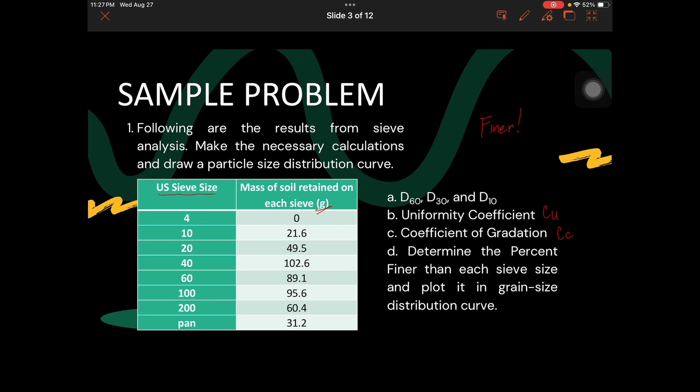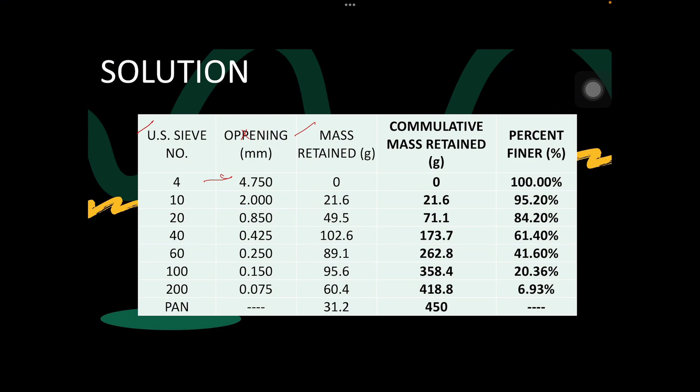This is the equivalent size in terms of millimeters. Same thing for number 10, which is 2mm, number 20 is 0.85, and so on, number 200 is 0.075 millimeter for its opening. This is very important because it's one of our coordinates later when plotting the particle size distribution curve.

Next, mass retained - what we need to do first is get the total. So when we add 0 up to 31.2, we get 450 grams.

After that, the next step is to get the cumulative mass retained, still in terms of grams. When you see the word cumulative, it means it is the previous plus present, so we can get the actual value - the before, then during, to get the actual.

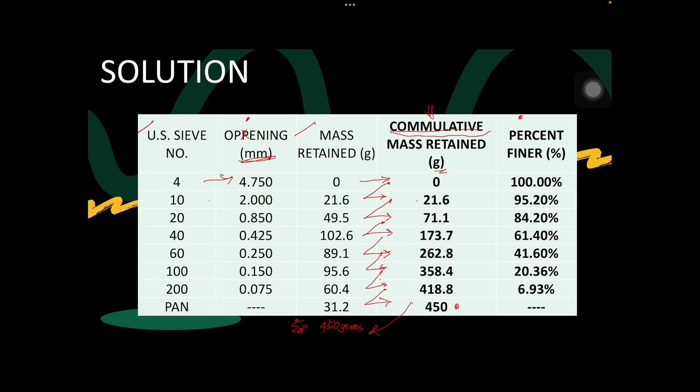Assuming this value is the summation of the entire result from the sieve analysis, and cumulative mass retained - let's denote that as Y.

To get our percentage finer, let's call it Z. Z equals summation of the entire mass minus Y, or in this case Y1, this value, Y2 - it varies.

Then this is also the summation of the mass. Since we're talking about percentage, we multiply by 100%. For Y1 or the first variable: 450 minus 0, divided by 450, times 100, equals 100%.

Next, again 450 for the total mass minus 21.6 for our second Y, over 450, times 100, we get 95.2% as the percentage finer, and so on. That's how we solve the percentage finer - this is our X value, and this is our Y coordinate for plotting.

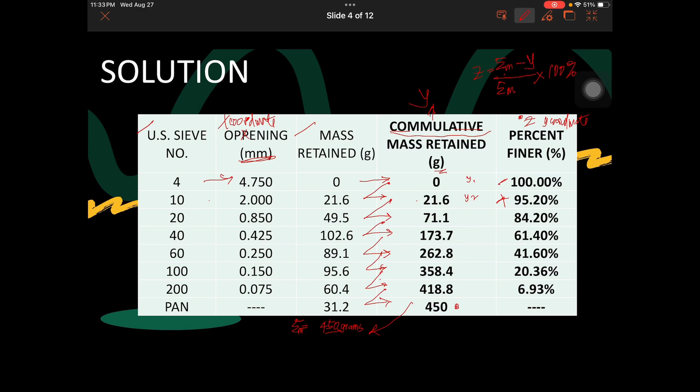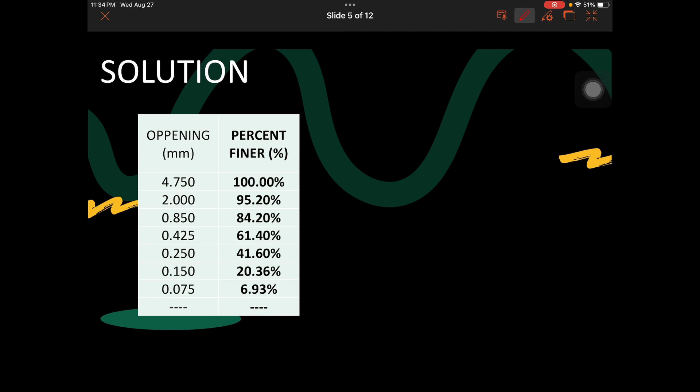X coordinate. So after we identify our coordinates, let's simplify them. At opening 4.75, we have percentage finer of 100%, 2mm at 95.2, 0.85 at 84.2, 0.425mm with 61.4 percentage finer, 0.250mm with 41.60 percentage finer, 0.150 for 20.36% finer, and 0.075mm for 6.93% finer. So these are our X coordinates. This is our Y coordinate.

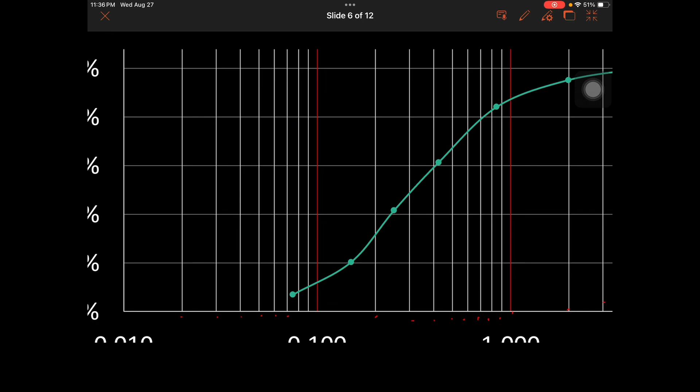So to compute the diameter at a specific percentage finer, we just plot a line. For example, D60. This D60, this line, this D60, what is this value? This point.

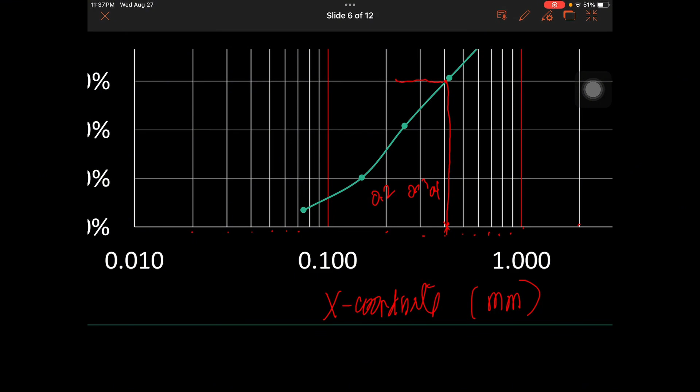What is its value? Then we project it to our value here. This is just a projection to this value. Then what is its diameter? So if we're looking for diameter 60, what is this value? So if this is 0.1, we can say this is 0.2, 0.3, 0.4. So 0.4, then somehow it goes to 0.41, but it's a bit uncertain, or we could say it's 0.41. D60 is 0.41.

Next, D30. This is 40, this is 30%. What is the diameter at 30% finer? So if we project this, what is its equivalent diameter? In this case, it's close to 2. We just estimate what the value will be. This is 30, we project. So approximately we can say that D30 equals 0.189 or 185.

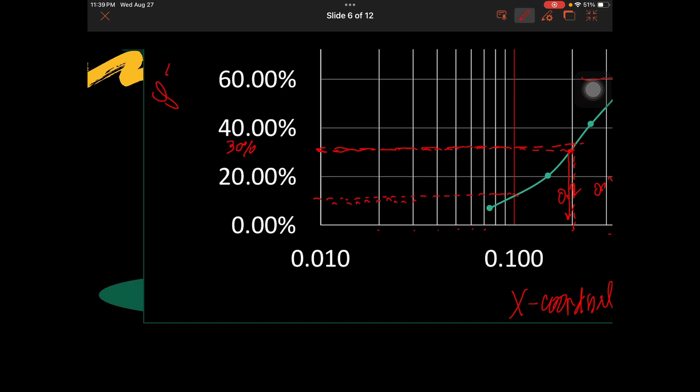Next, for D10, same thing. If this is 20, this is 10. So we project it. We need a straight edge to see where our value or graph intersects, a bit slanted. So we can say that D10 equals 0.088, or 0.09 in some cases. Is this it? 0.09.

So that's how we determine the diameter at a specific percentage finer, depending on what type of diameter at the specific percentage finer. So the first procedure we use is this scale. The catch here is we need our values at least scaled, because we will project them onto the graph. So D60 is 0.41, D30 is 0.189, D10 is 0.088, based on our particle size distribution curve.

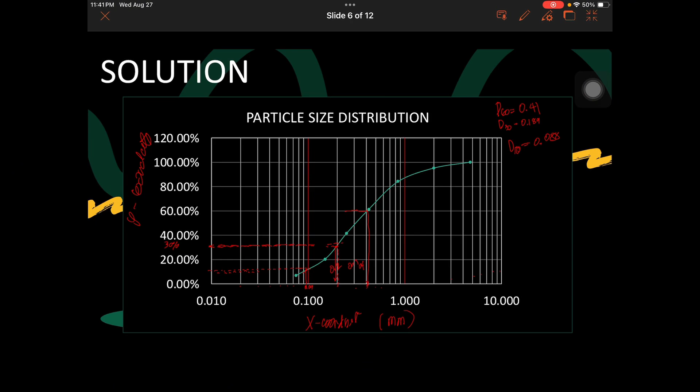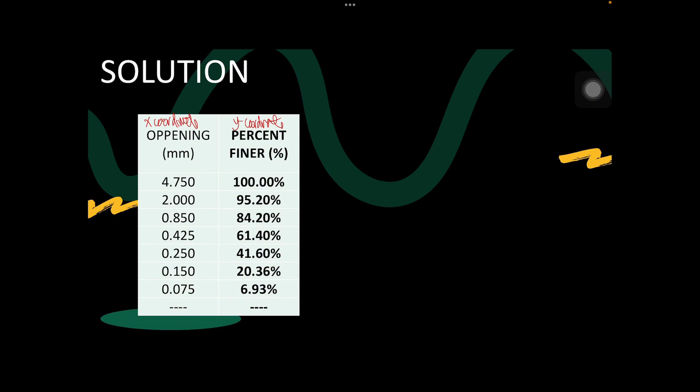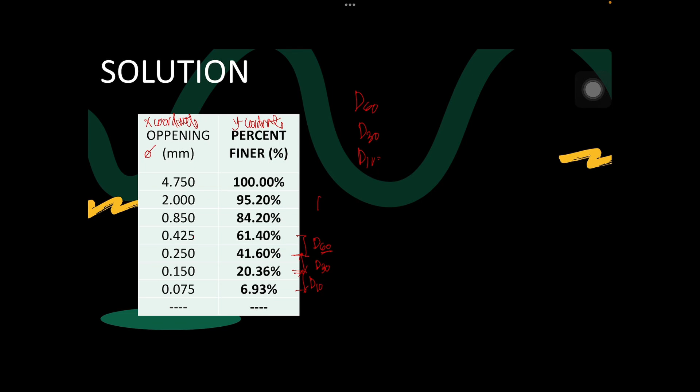Second procedure is we use interpolation. Going back to this, 4.7 is finer. As we said, the diameter is the opening at a percentage finer. So if D60 is what we're looking for, we need to find D60 between these values - diameter at 60% finer - because between 41 and 61.40, that's where we find 60% finer. Same thing for D30, it's between 20.36 to 41.60. And for D10, between 6.93 to 20.36, that's where we find D10. Let's find their diameter based on our percentage finer.

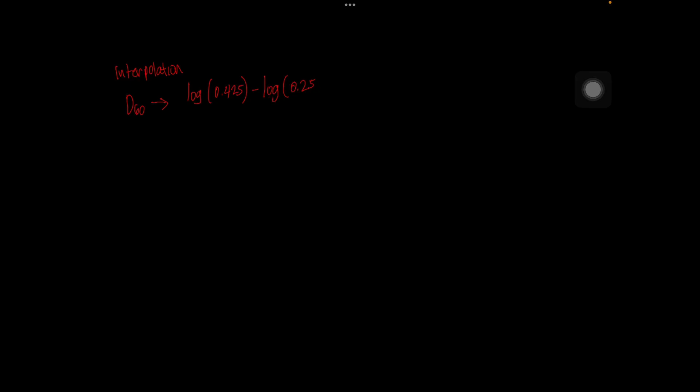Logarithm, since yung x value or yung diameter, yung mga may logarithmic scale, so logarithm at 0.425 minus logarithm at 0.250, divided by 61.4, ito yung kanilang percentage finer, minus 41.60. Ito yun.

Ito yung mga value na yan. Tapos interpolate natin logarithm of 0.425 minus logarithm of the diameter at the 60% finer, 61.40 minus, since percentage finer pinag-usapan natin dito, hinahanap natin yung pang 60, compute natin yung 60% finer. Kapag sinolve natin yan, D60 is equivalent to 0.409, which is roughly equivalent sa ating pagpa-plot.

Next, for the D30, ito mga value naman na to yung tinitingnan natin between this 0.15 and 0.250. Doon natin mahahanap yung diameter at the 30% finer.

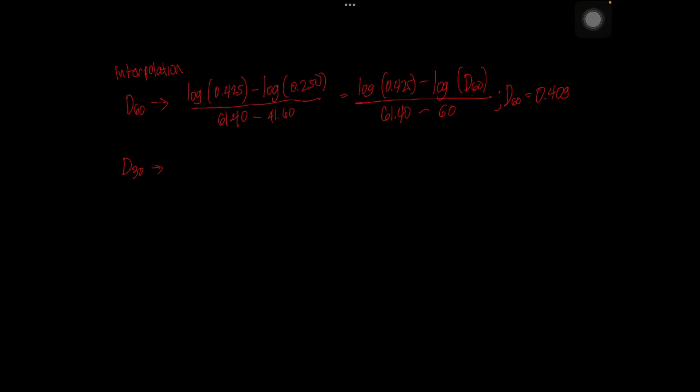Okay, to do that, again, naka-logarithm yung x coordinate natin, 0.250 minus logarithm at 0.150 over 41.60 minus 20.36. Between this value, natin mahanap yung the diameter at the 30% finer.

Logarithm of 0.250 minus logarithm ng D30 over 41.60 minus 30% finer. So, kapag sinip-solve natin yan, makakuha tayo ng value na 0.189.

Okay, for D10, dito natin mahanap sa value na to between this value. Okay, so again, logarithm of 0.150 minus logarithm of 0.075 over 20.36 minus 6.93.

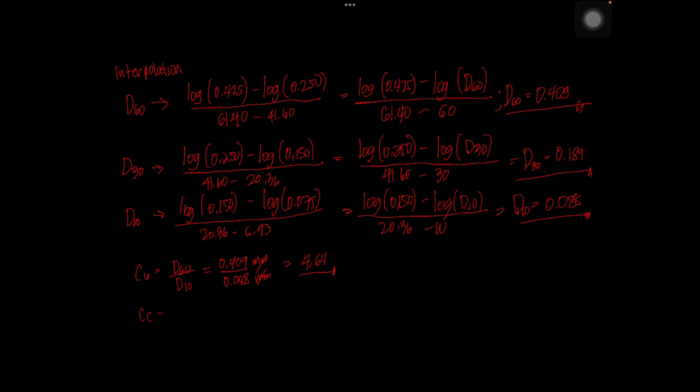Coefficient of gradation D30 squared divided by D60 times D10, which is 0.189 squared over 0.409 times 0.088. Nakakuha tayo ng 0.189 squared divided by 0.409 times 0.088, 0.99 na sagot.

Indeed, meron kakaroon tayo ng possible na iba't ibang sagot, pero hindi naman dapat siya at least nagkakalayo. Okay, so meron namang mga considerable variations naman since depende sa pagra-round up natin. Okay? So, ganun isolve yung problem number 1.

For problem number 2, the grain size characteristics of a soil are given. So, given natin is size in terms of naka-millimeter na siya, 0.425, etc. And the corresponding percentage finer. So, ito yun na yung mga coordinates natin. Ito yung x, ito yung y coordinates. So, there's nothing to solve pa yung mga percentage finer since given na siya.

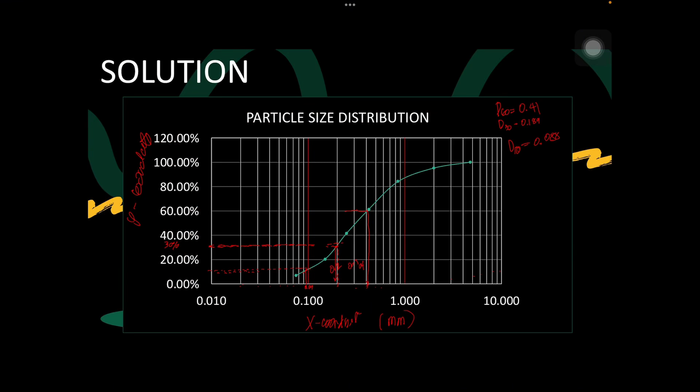Ito yung sinasabi ko, pag greater than 2 mm gravel na yon, between 2 mm to 0.06 is sand, so on and so forth. Kaya kailangan kabisado natin itong particle size distribution table.

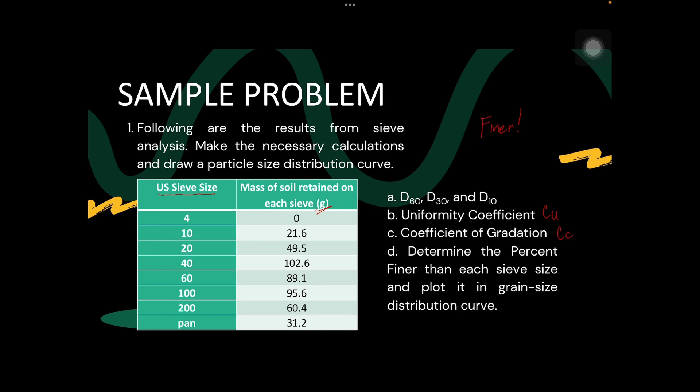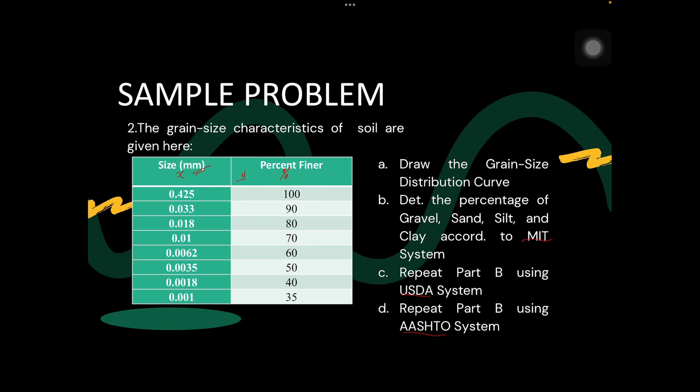Ito naman 90 na 0.033 na 90 yung kanyang coordinate. 0.018 para sa 80% finer. Next naman 0.01 para sa 70% finer.

Ito naman 0.0062 para sa 60% finer. Tapos D50 na 0.0035 tapos 50% yung y coordinate, second to the last 0.0018 tapos yung kanyang y coordinate is 40, and lastly 0.001 tapos yung kanyang y coordinate is 35.

Okay, so ito yung ating plot. So first, ito yung answer sa letter A, yung pagpa-plot ng particle size distribution curve or particle size distribution table natin.

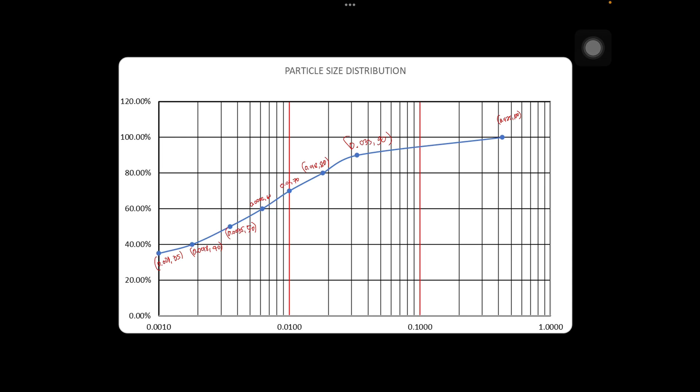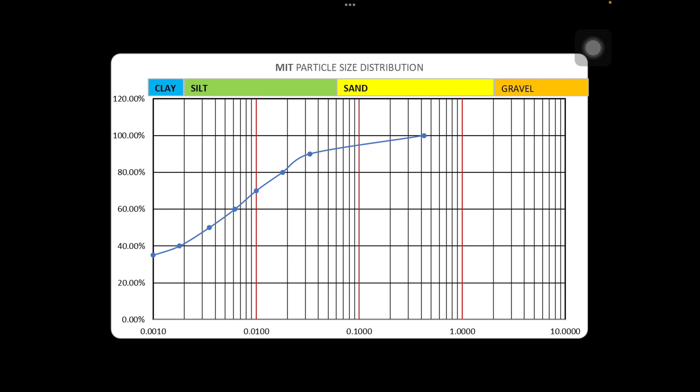Next, solve naman daw natin kung ilang percent yung gravel, ilang percent yung sand, ilang percent yung silt, at saka ilang percent yung clay base sa MIT. So, for the sake of the discussion, ipipilat ko na yung mga increment or mga limits para sa MIT, para sa gravel, sand, and silt, and clay.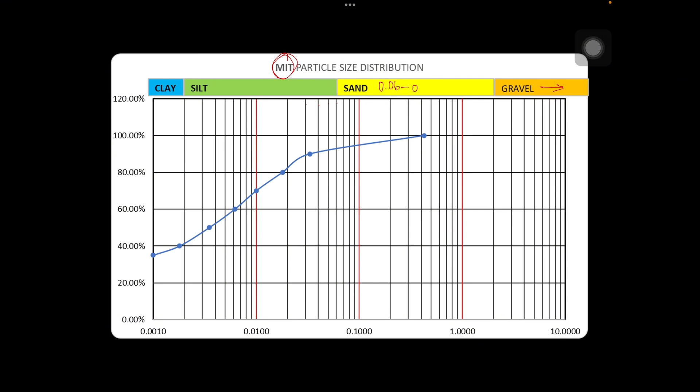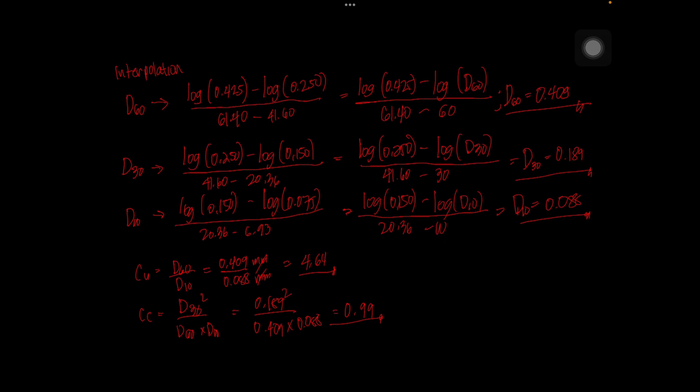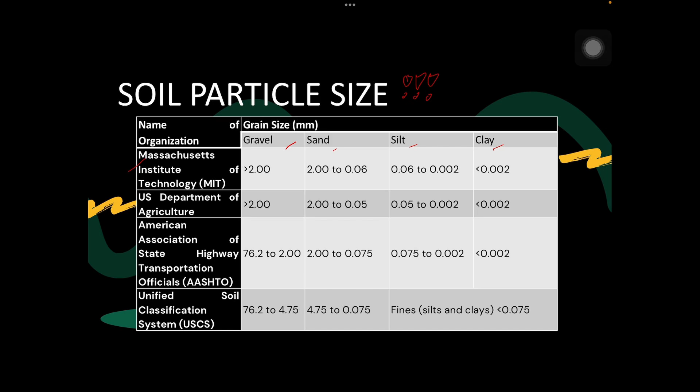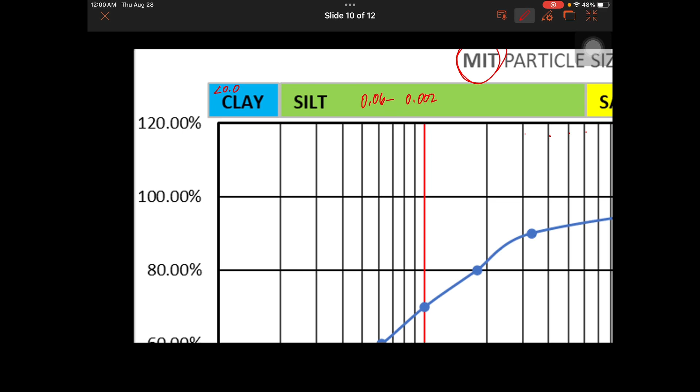So for the gravel again, greater than 2 millimeter, and for sand naman 2 millimeter to 0.06 millimeter. For silt naman, we have 0.06 to 0.002, and less than 0.002 is considered as clay. So ito yung kanilang mga limits. Bahin natin yung kulay.

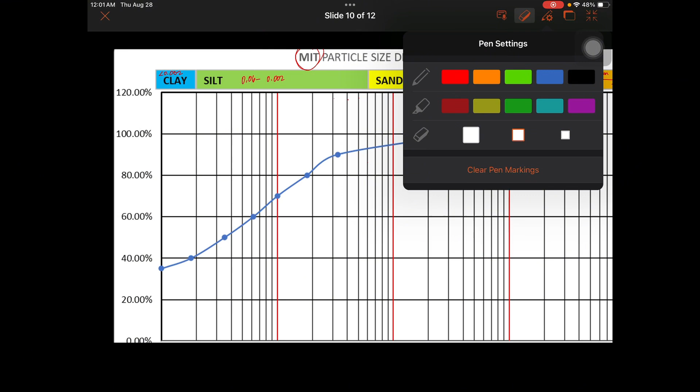Ito yung mga boundary nila.

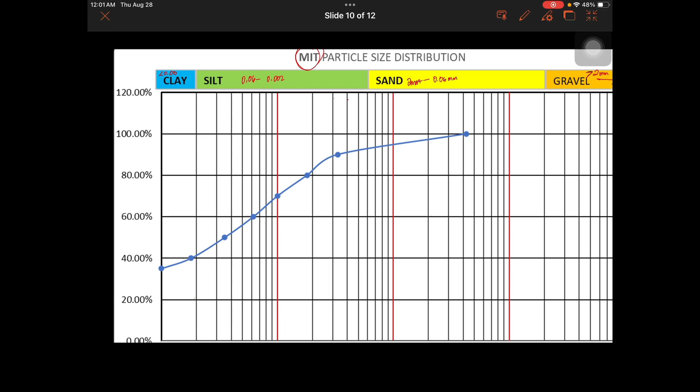Okay. So ilan daw yung percent ng gravel, ilang percent yung sand, ilang percent yung silt. So para hindi tayo malito, ulitin lang natin yung pag-coordinate.

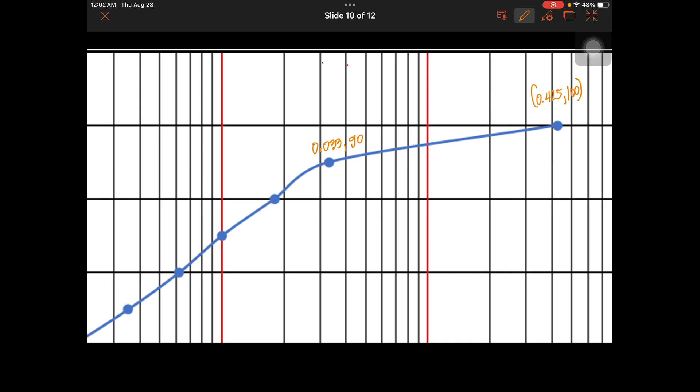This one is 0.425 for the x-coordinate, tapos 100% yung ating coordinates. Second point, 0.033, tapos yung coordinate niya is 90% finer. Third, 0.018, tapos yung kanyang coordinate na 80%. Next, 0.01, tapos 70% yung kanyang finer.

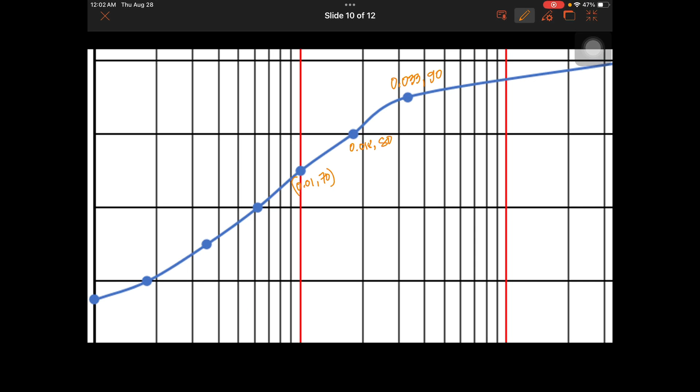Para naman sa 60% finer, 0.0062, tapos 60% finer nga siya. Next, 0.0035, tapos yung kanyang percentage finer is 50%. Next, 0.0018 for the x-axis and 40% for the percentage finer. Last, 0.001, tapos yung coordinate niya is 35.

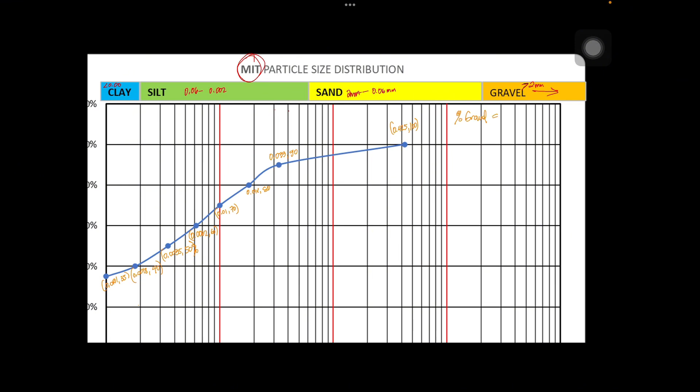Ito yung ating coordinates. Okay. So since unahin natin yung percentage ng gravel. So yung gravel natin, since hanggang dito lang ang ating plot or yung curve, so wala tayong gravel dito, or 0%. 0% yung gravel base sa MIT.

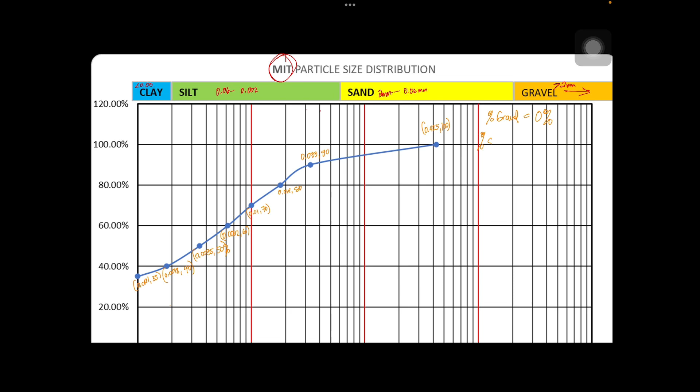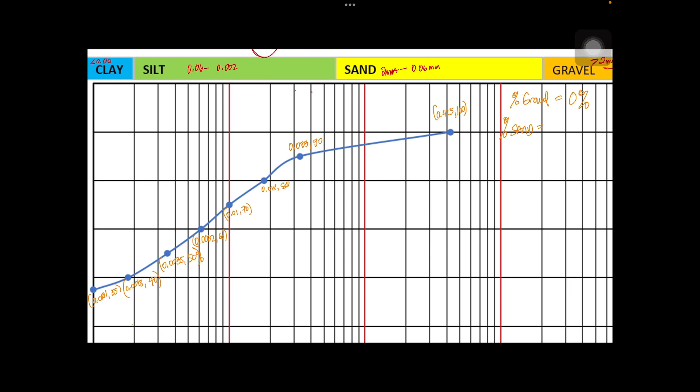Next, percentage of sand o yung bahangin o yung fine aggregates. Ilan lahat yung hanggang dito, hanggang dito sa limits na to. Between 2 mm to 0.06.

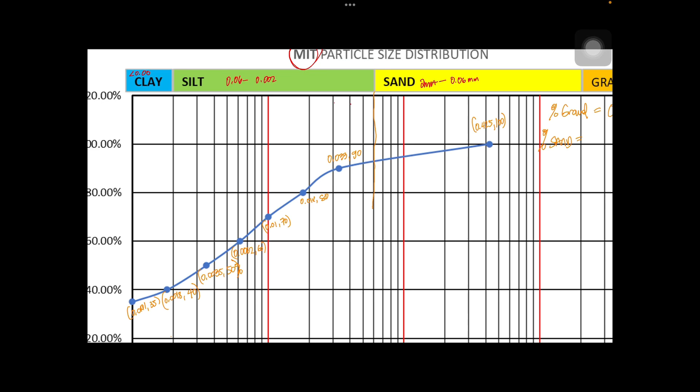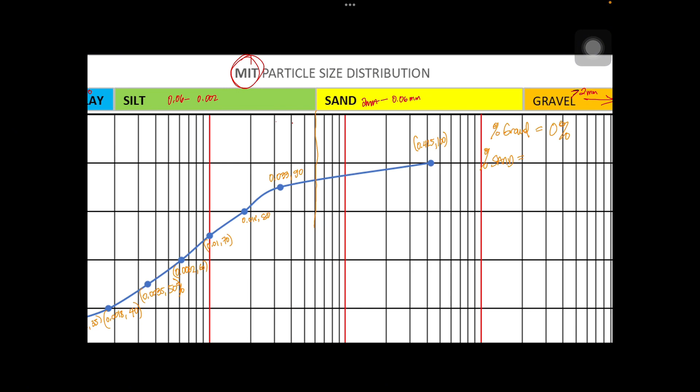Dito, since mga percent finer yung percent of gravel, sand, and silt, so magmamatter muna sa atin yung mga percentage finer. So in this case, nasa 100% tayo. So we just subtract 100 minus ilan tong value na ito.

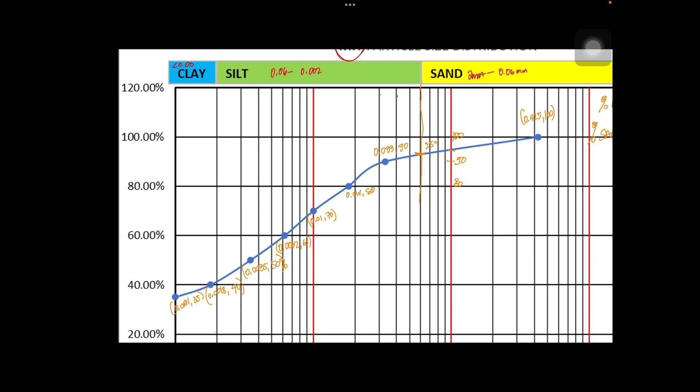So base sa ating computation, so if this is 100 and this one is 80, sandali po, i-reflect ko lang. Ito yung ating 90% finer, nasa gitna siya. This is the 95%. Okay? That means 100 minus 95, yung percent ng sand is 5%.

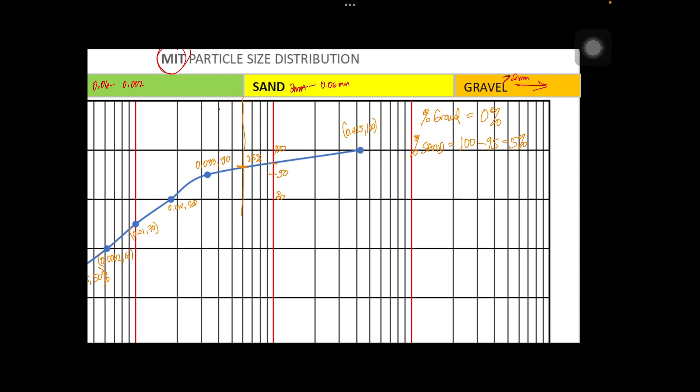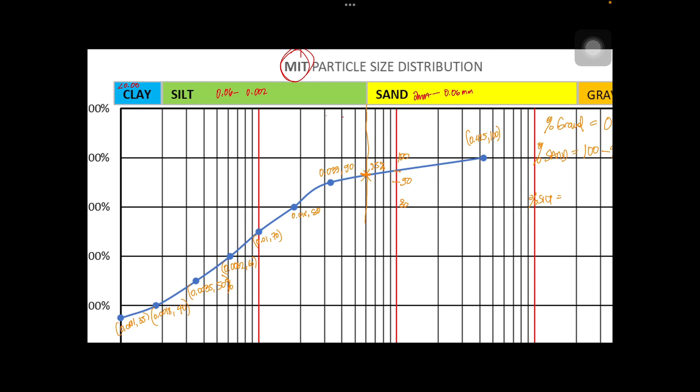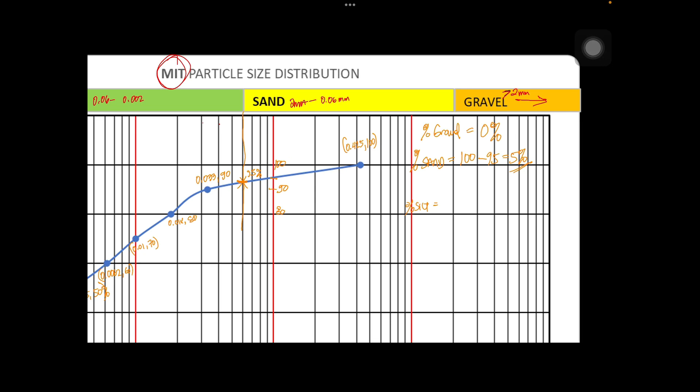Kumbaga, projection. So next, percent of silt. Yung silt natin is between this value hanggang dito sa ating limits. Yun daw yung ating silt. Ibig sabihin, 95% minus, this value is 95, ilan daw ito.

So if this is kalahati, this is 50, kalahati is 45, 44, 43, 42, 41, so roughly this is at 42%. Ibig sabihin, 95 minus 42, that is roughly 53%.

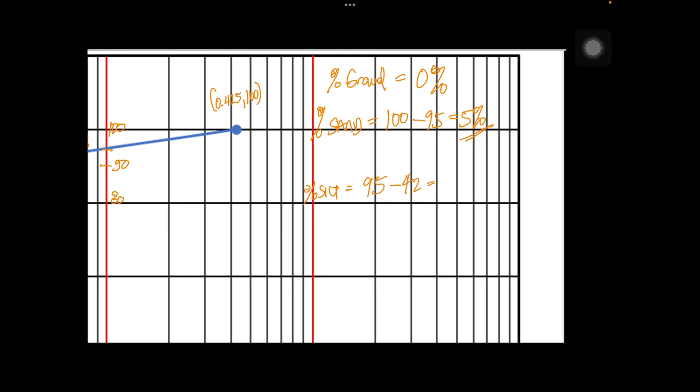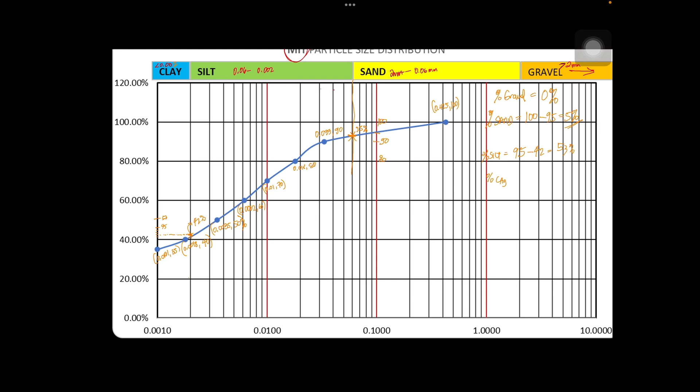And lastly, percent of clay, less than 0.002 millimeter. Okay, so this value, this is 42 minus, this one is 35. Sorry, 42 minus 0%, so this is 42, tas hanggang dito.

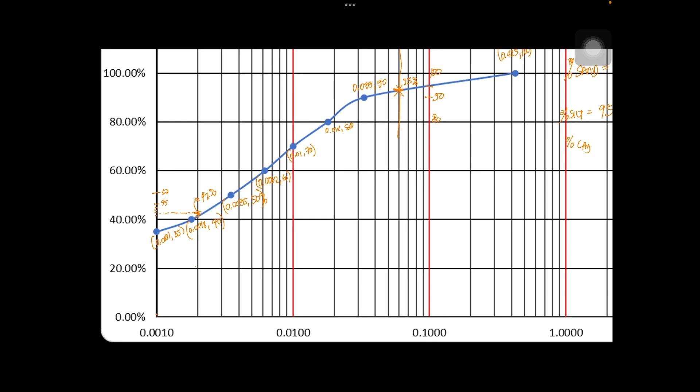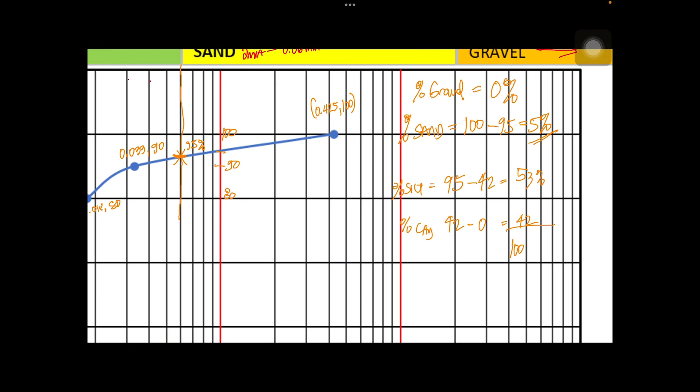42 minus 0, that is 42. So 42 minus 0, that is 42. So kapag pinag-add natin yan, 5 plus 53 plus 42, that yields to 100%. Okay? So ganun yung pag-compute ng mga percentage ng mga gravel, sand, and silt, tsaka clay.

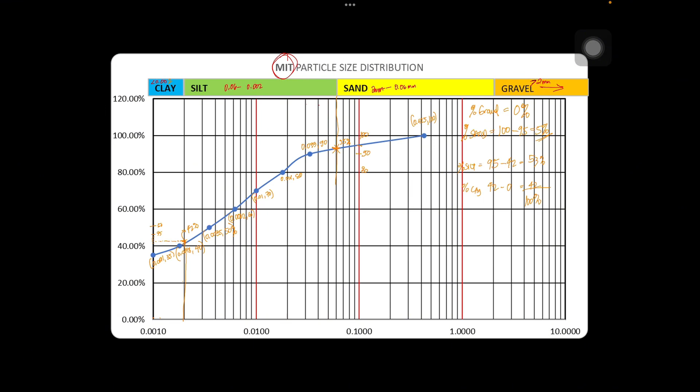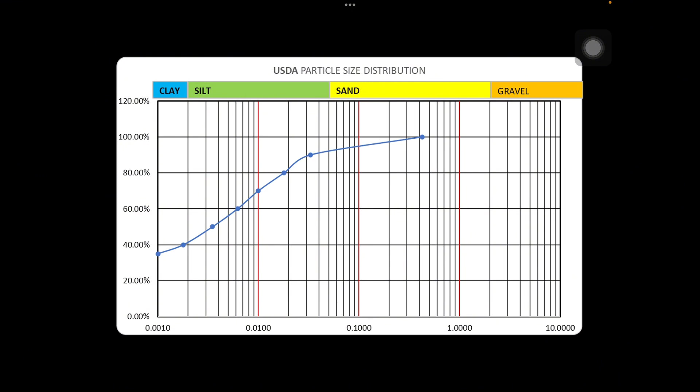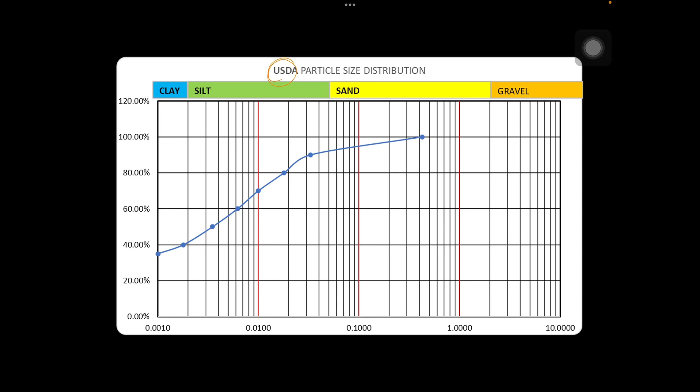Okay? Next, for USDA, ganun pa din. So since USDA na yung ating kino-consider, gravel natin is same na, greater than 2 mm. Sand naman is 2 mm to 0.05, sorry, 0.05 to 2 mm.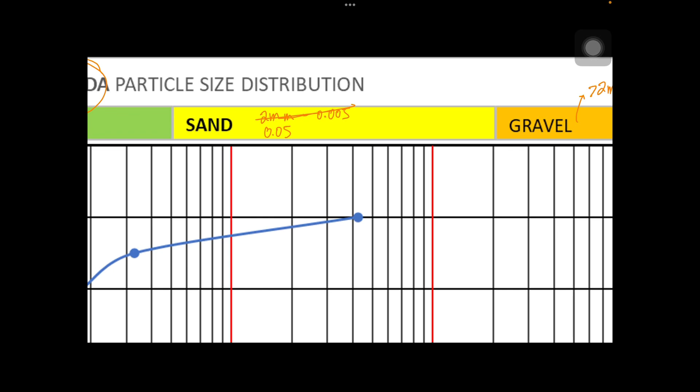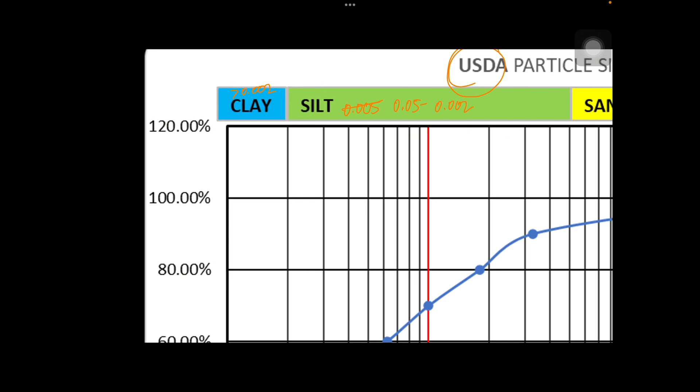For silt naman, 0.05 to 0.002, and less than 0.002 is considered as clay. So dito natin, ganun din, same procedure. Ilan ba yung nagpasa through sa gravel. Yung passing 2 mm, that is 0 for gravel.

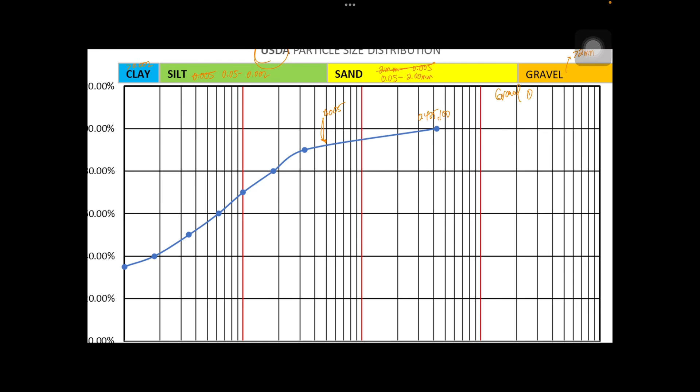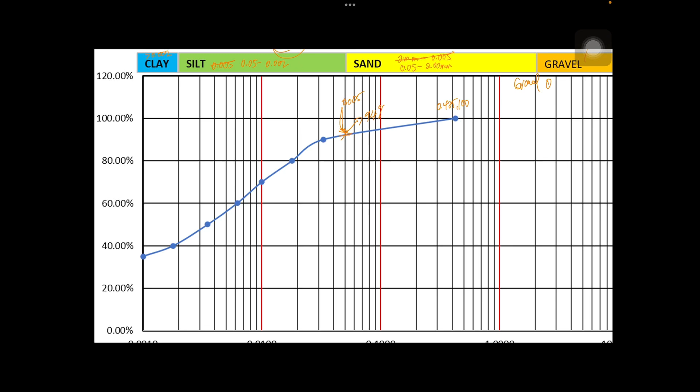Okay, yung natira naman from sand, this is 100, o yung coordinate natin is 0.425, 100, tapos hanggang dito, this is 0.05. Okay, so what is this value? So this is roughly approximately 94%.

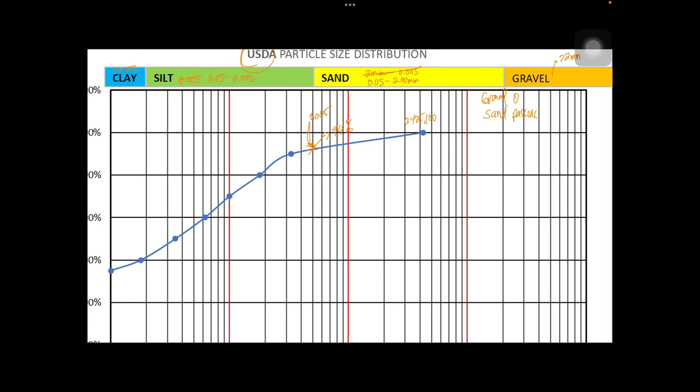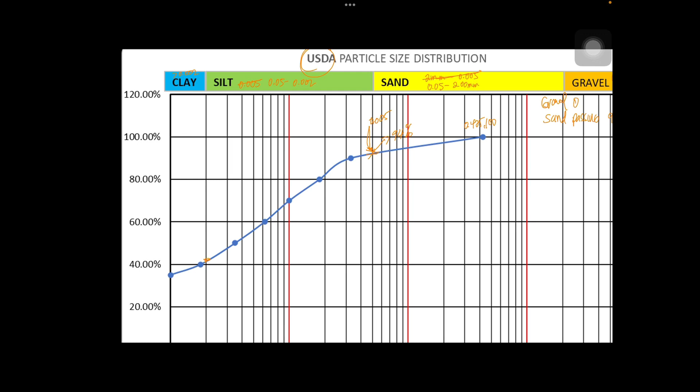So ibig sabihin, yung lumagpas dito is 94%. For sand passing is 94%. Dito naman yung lumagpas dito is from... dito natin for percentage of gravel for USDA. Okay, ilan bang percentage of gravel? Okay, which is, since wala tayo, di umabot dito yung ating gravel, so that means 0% yung ating gravel. Next, for sand, percentage of sand, this is this value na 100%,

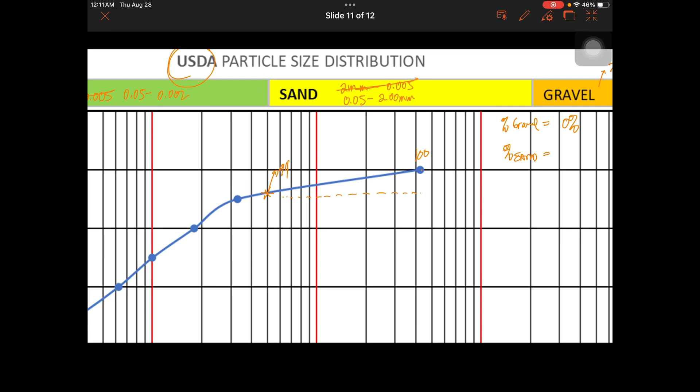and this one naman is roughly yields to 94. So kung i-project natin ito, ano to in short, so that is 100 minus 94, approximately 6% para sa sand.

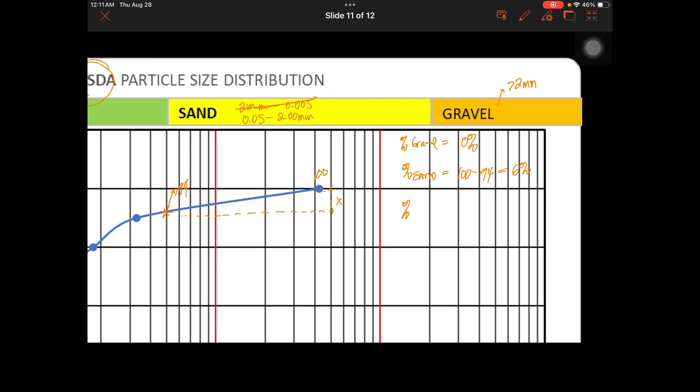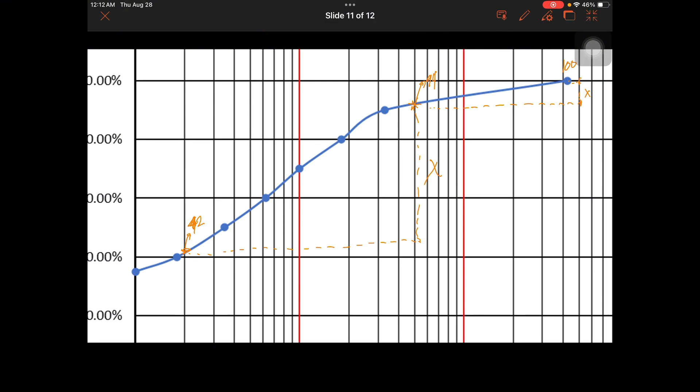Para naman sa silt, so this is, if this is 94 and assuming this is 42, okay, 42 kamukha lang ng na-compute natin kanina. So kapag pinoproject natin ito papunta dito, what is this value? Or we can say na 94 minus 42, ibig sabihin equals to 94 minus 42, that is 52.

And percentage of clay, this is 42 minus 0, or 42 hanggang dito. Kaya siya 42 minus 0 or 42. So kapag pinag-add natin 6 plus 52 plus 42, that is yields to 100%. Ganun lang pag-compute for particle size distribution base sa iba't ibang mga organization.